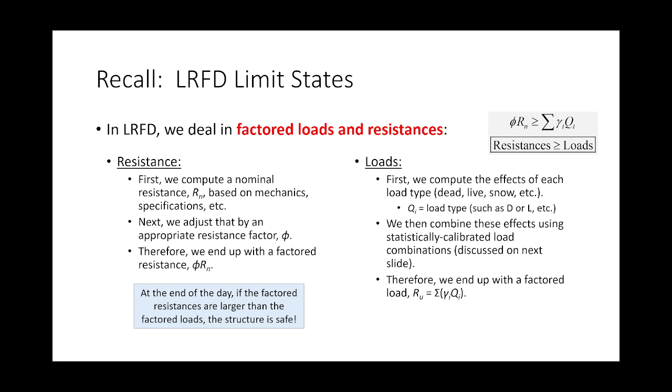So let's recap. Factored loads, factored resistances. We are in LRFD land, so we compare our 1.2 dead and 1.6 live against our factored resistances. Right now, we have two limit states associated with tension members: gross section yielding and net section fracture.

What we're going to do a little bit later, probably Friday of next week, is add one to this: a limit state called block shear. Block shear is essentially, for lack of a better term, a little bit of a weird phenomenon around the connection region, where some of the connection region fails in shear, some of it fails in tension, and you kind of just rip a chunk out of the section of the member. The equation is actually pretty easy, but it's also pretty long. For gross section yielding, it's just these three terms.

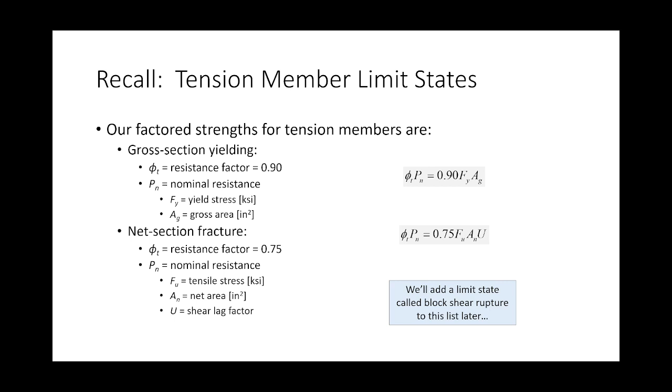And yet if you look at the block shear equation, it's like this big. The first time you see it, you're like, whoa, what's going on here? But it's actually not too bad. It's pretty straightforward, a lot of just gross and net areas. You just got to pay attention. But we'll get to that later.

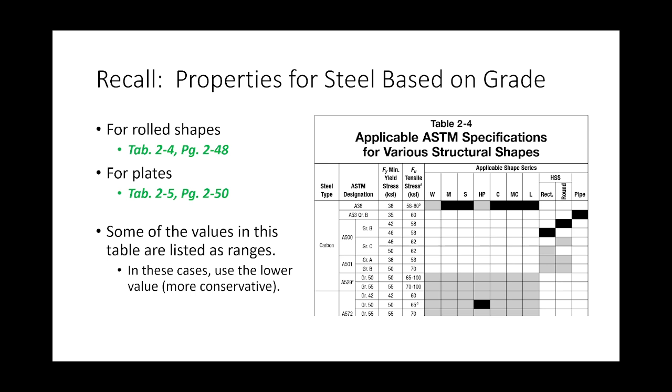Tabs. If you haven't tabbed this, it would be a good one to tab: FY and FU for various ASTM specifications for various steel grades. We've got our complete expression for AN now.

So we know that the net area equals the gross area minus the area lost due to the presence of bolt holes, plus any necessary stagger factors. We add the stagger factors because the whole point of creating a staggered connection is to increase the net area.

That stagger factor is an empirical term intended to account for the benefit we get from a staggered bolt arrangement. Remember the effective hole diameter: we take the bolt diameter and add 1/8 of an inch. You all won't like me when we get to bolted connection land, because when we look at bolt bearing capacity of the members, we're not going to add 1/8 of an inch, we're going to add 1/16 of an inch, since we're actually looking at the physical dimensions of the hole. That's post-exam 1, so you don't need to worry about it now, but just know it's coming.

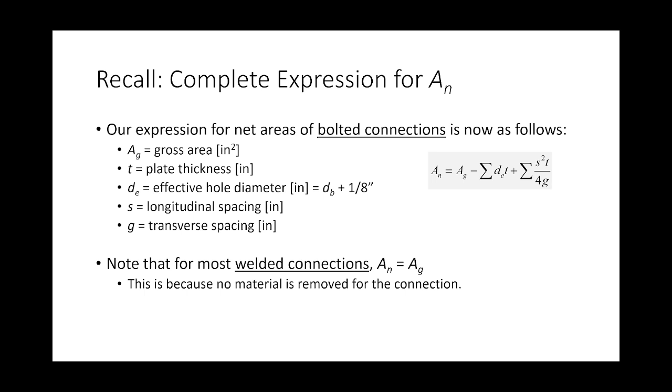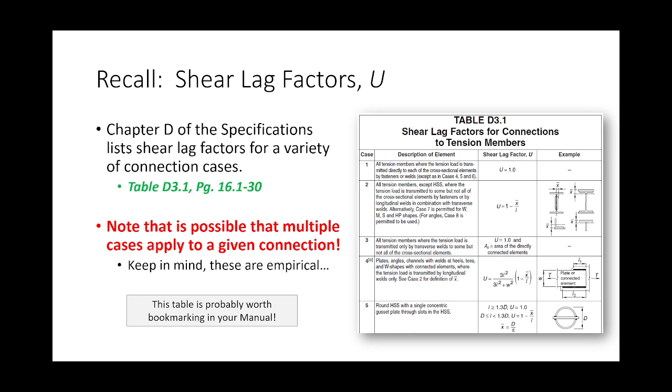That's for bolted connections. For welded connections, net area equals gross area. Shear lag factors are going to be in this table in the spec, table D3.1. If you haven't tabbed this, I would—probably between what I've already told you to tab and the shapes. This is probably all you need for the first exam.

This is the example we are going to do today. We're not going to look at a factored load, we're just going to compute the capacity. But I want to talk a little bit about this problem because it's kind of weird.

We have this bolt arrangement here. This is the cross-sectional view. And then I'm showing you this, and you're like, what the heck's going on here? So let me explain.

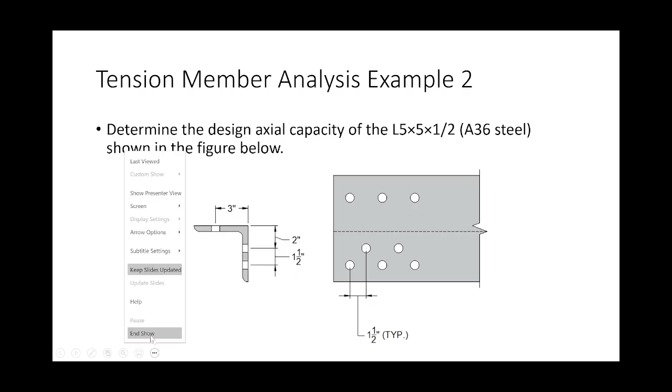I decided to break out some Inventor. Have you ever used Inventor? Okay, so I drew this member out in Inventor so that we could all kind of see it in 3D. So what we've got here is an angle.

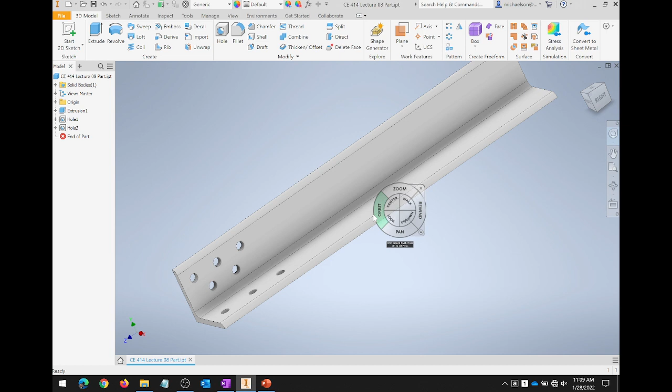What I want to illustrate is that we've got basically a staggered bolt arrangement. One leg of the angle has 2 lines of bolts in it, the other has 1. But the most important thing to pay attention to is that the stagger actually crosses the angle legs. So we have one staggered path that goes like this, and another staggered path that goes like this. The stagger on this second path actually crosses from one leg of the angle to the other.

So there are two points to recognize. Number one, we are going to have different stagger factors for this diagonal path than for this one, because the dimensions are different. So instead of it being the gross area minus 3 bolt holes plus 2 stagger factors, it's going to be the gross area minus 3 bolt holes plus 2 separate, different stagger factors—stagger factor 1 and stagger factor 2.

The other thing I want you to pay attention to is: how are we going to determine what this distance is? And the way we're going to do that is with this image right here.

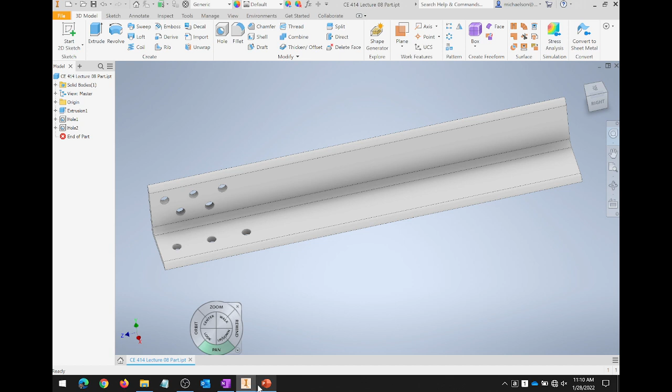In this image I'm breaking out the samurai sword, or the lightsaber if you're a sci-fi fan, making a little cut right here, and taking this angle and sticking it on top. So I'm actually turning the angle conceptually into an equivalent plate, so that I can determine this distance and that distance, which is the one I'm most interested in. Does that make sense?

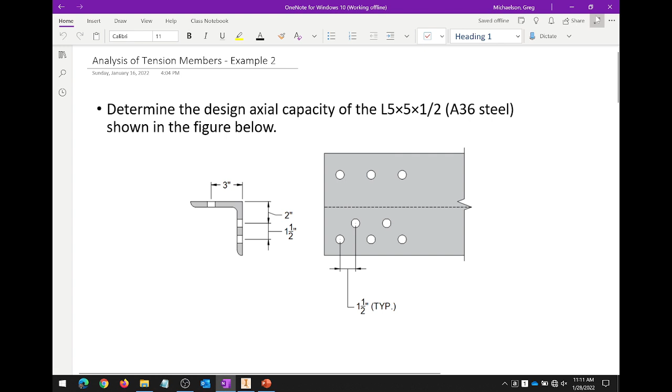I think what's most important is to just get the dimensions figured out across the board. Once you get the dimensions figured out, the rest is pretty straightforward. So let's blow this up a little bit, and make sure we're all clear on the dimensions.

Okay, so this angle is L5 by 5 by 1/2, so it's 1/2 inch thick. What that means is, when I say 5 inches, that 5 inches goes from the back of the angle to the tip. So let's make sure we're paying attention.

What is that dimension right there? Say it again—2 inches. What is this dimension right here? 2.5 inches? 1.5. Okay, so let's write it like this: let's do 1.5 inches.

With me so far? Now what we're going to do is indicate these dimensions over here. So would you agree with me that this dimension is the 1.5 inches—like this dimension here and this dimension here are the same thing? What's this dimension?

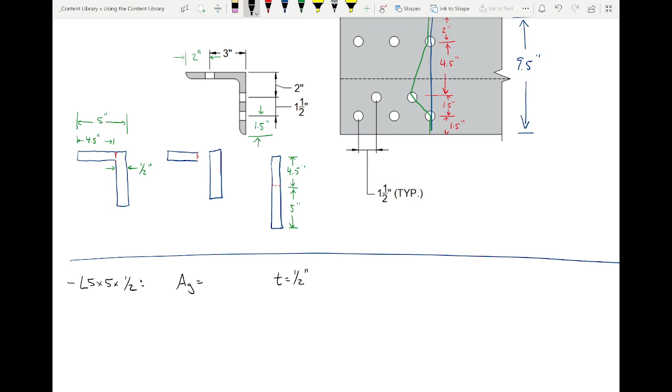And we got that from table 1-7. Is everybody else able to find that? Okay, so we're going to need that. We are also going to need the material properties.

Now for this problem, we are dealing with A36 steel. So we're going to need Fy, Fu. I believe you've already had a homework problem where you had Fy and Fu. So Fy for A36 steel is what? And for Fu, what is it? 58. There's a range, use the minimum. So this is 36 KSI, and this is 58 KSI.

All right, and this is from table 2-4. Hold on. So I am trying to ensure that I'm writing references so that you're not going, where the heck is he coming up with these values? So, okay, I'm going to do all my limit state calculations in the end.

I could go ahead and do gross section yielding, but I'll just wait. We'll do that later. Let's do the net area.

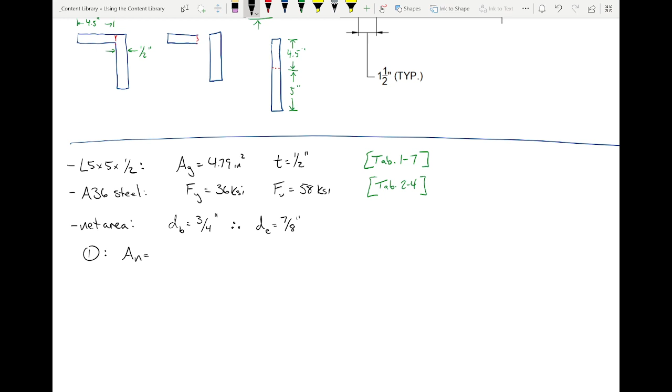Let's do failure path 1. So as we said, the net area is the gross area minus, and how many bolt holes are we going to subtract for net or path 1? 2. So 2.

d_e t, which is, here, let me move this down a little bit so it doesn't crowd it so much. Or 4.79. So what is that? Do I have a second on that?

Okay, now let's do path 2. So path 2, we're going to do the gross area minus 3 bolt holes plus the stagger factors. Now let's talk about those stagger factors.

What is the formula for a stagger factor? Let's put that up here. That's the formula for a stagger factor, right? S squared T over 4G.

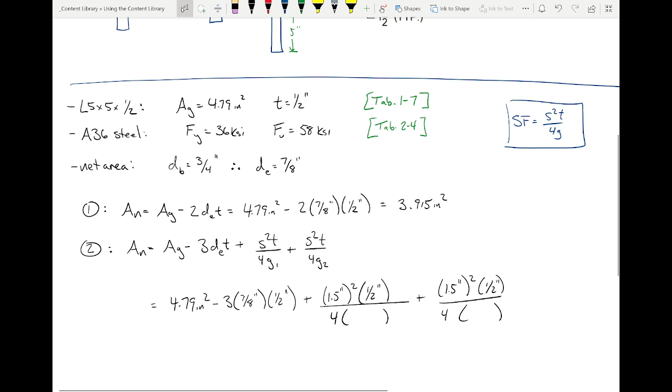So we need the two G distances. It doesn't matter what order we put them in. What are they? 4.5 and 1.5. And so what does this come out to be?

3.73 square inches. Do I have a second on that? What? I've done something wrong. Take your time. Yeah, 3. Check your exponents and check to make sure you got a 4 on the bottom of your fractions.

All right, so we've got two values here. Remind me, which one do we use? The smallest. Yes, sir. Can you scroll up to the picture a little bit? Yeah, hold on, let me write this down so I don't forget.

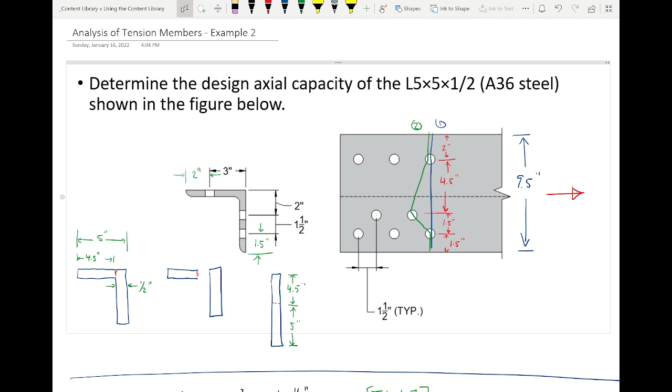So I'm proposing that if we were to just treat the angle as a plate, the gross area is 4.75. But what is the gross area? What are we using? We're using 4.79, so we're accounting for that little bit of additional area. It's not that much, just a little bit. It's from the way angles are formed, there's a little fillet there. So we don't really worry about it from a stagger factor perspective, but we do account for it.

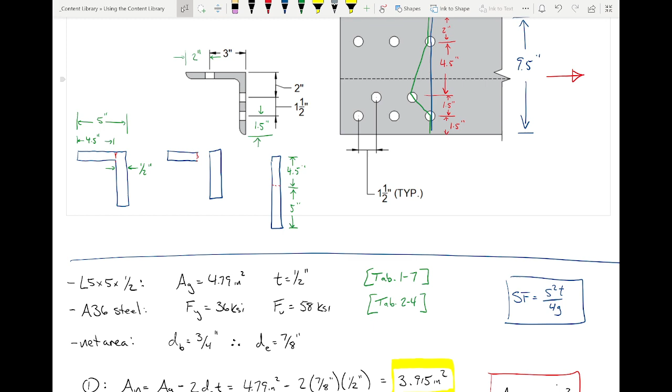This is great stuff, that's a great question. Any other questions? This is good stuff. Okay, so there's the net area.

Now, shear lag factors. This is table D3.1. Now we're going to have a discussion on this one. So I want everybody to turn to table D3.1. I want to look at this for a second. I'm going to ask a simple question: what's the shear lag factor for this problem?

1. Why? Because both of the sides have holes, so it falls under case 1. That's exactly right. Whenever you look at the shear lag factors, what you're looking at initially is case 1 versus case 2. Case 1 says all of the cross-sectional components are connected by fasteners or welds. Case 2 says some of them. It's never none of them, because it's got to be connected to something. So it's either all or some. But in this case, all of the cross-sectional components are connected by fasteners or welds, so U is U1, or 1.0.

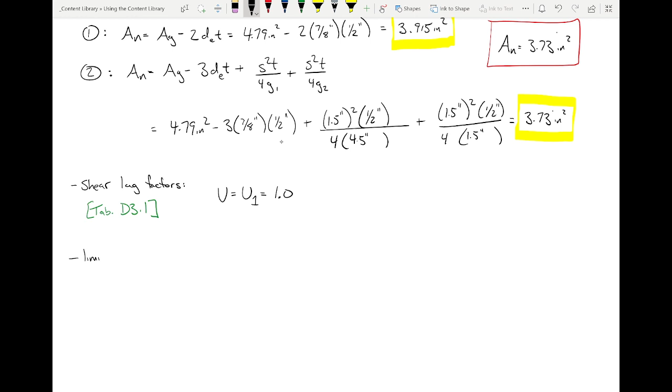So gross section yielding, that's 0.9 FY AG. FY is 36 KSI, this is 4.79. So when I chug this out, what do I get? We'll say to one decimal place, because when you're looking at capacities in terms of kips, one decimal place is enough. 155.2. Well, do I have a second on that? Okay, kips.

All right, now how about net section fracture? So 0.75 FU ANU. What's that? 162.3 kips. Do I have a second on that?

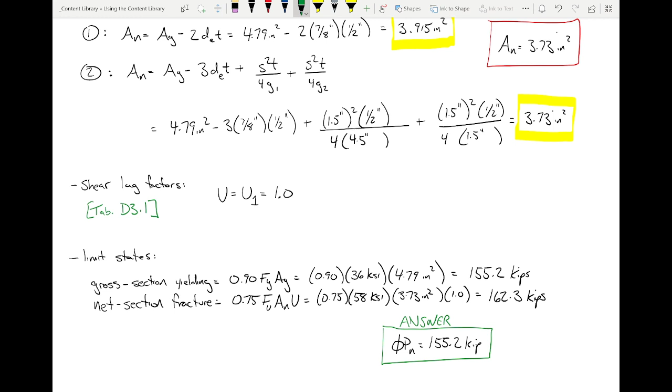Anybody have any questions? All right, I want to talk a little bit about design before we call it for today, because we've got a little bit of time, so I'm actually going to skip ahead a little bit to the next lecture, because I think this is important. So I don't have this posted yet, so don't—this is my lecture from last year, so the slides are old and whatnot.

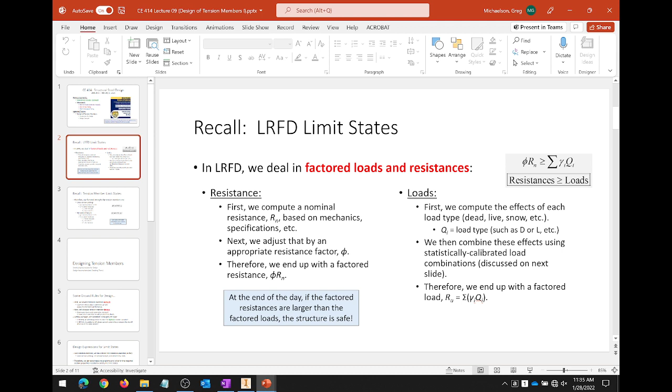No, it's just the date's off.

I want to talk a little bit about design because I want to illustrate this concept to you. What I'm going to put on that pre-recorded video is just the plug and chug component of it. What I want to talk about today is the concept.

So first off, let's take a step back. Today and in the previous lecture, we did tension member analysis, or tension member assessment, whatever you want to call it. What that means is we've been given a tension member and we're saying, okay, here's the tension member, how much can it hold up?

Basically, we are assessing a tension member that has been given to us. But that is not design. Design is: I know I have a structure that's going to need a tension member right here, which tension member do I select to safely resist that load? That's design. Design is selecting the components and the assemblages of a given system. That's what design is. So we need to talk about that for a little bit.

I want to explain how we do it. So we covered tension member analysis. Given details about a member, we can assess the member's performance. Now we're going to talk about design. What design means is that given some loads, given some constraints, we will select that element.

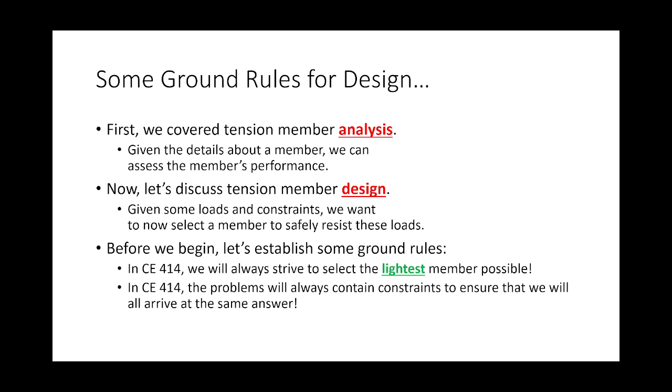So we're in design mode. What that means is we've got a member we're going to design or select to resist some given loads. So I know the loads, I've got the 1.2 dead and 1.6 live. So what's the resistance? Well, it's 0.9 Fy Ag if we're just looking at this limit state. So 0.9, I know that.

Fy - now let's say I didn't tell you what the yield stress is. Well, you could easily figure that out if you say, I'm going to use a W section, I can use Fy as 50 KSI because that's the preferred material specification. If it's an angle, we'll use grade 36.

So if I look at that equation, what's the unknown? The unknown is the gross area, right? So I can divide both sides by 0.9 Fy, and I can say that my gross area has to be greater than or equal to Pu over 0.9 Fy. So given a factored load, I can take that load, divide it by 0.9 Fy, and that gives me a gross area. And I know that if I pick a member that has a gross area of at least that, then I'm good. Boom, there's a design expression.

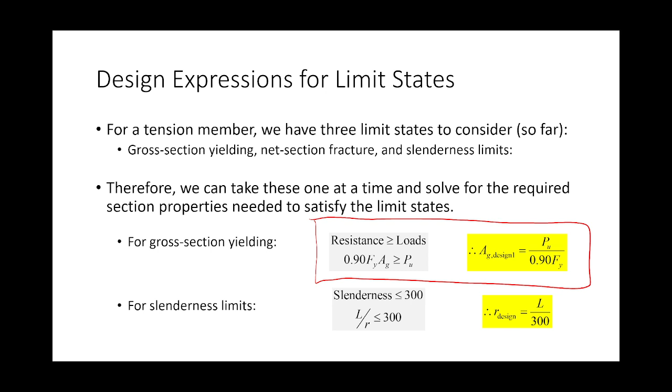What else do you need for net section fracture? You need a shear lag factor. How do you determine a shear lag factor if you don't have the connection geometry? You don't know what the member looks like. How do you determine 1 minus x-bar over L or any of that stuff? You have no idea. See, the problem is there is no closed form equation that we can come up with.

We can't solve for a required gross area for this because there's too many unknowns. The net area is a function of the thickness, but we don't know the thickness before the member is selected. The shear lag factor is a function of the member geometry, but we don't know that in the beginning. So what I like to do is make a guess.

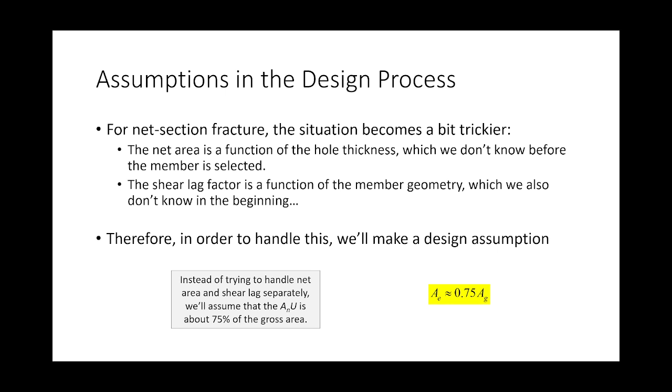A good common guess is that the effective net area, the net area times U, is about 75% of the gross area. That is a complete guess. It is an assumption, it is not always the case. Test the problem we just did - take the An times U and divide it by the gross area and see if it was 75%. It probably wasn't, it might have been pretty close, but by and large, for every tension member you could ever conceivably do, if you were to plot all that, that's about what it would be - about 75%.

So I propose that we can come up with a second formula for the gross area design, and instead of saying Pu over 0.9 Fy, we'll say Pu over 0.75 squared Fu. Now why is it 0.75 squared? Well, it's 0.75 squared because one of the 0.75s comes from the resistance factor, and the other 0.75 comes from this being 75% of the gross area.

For simplicity, what I like to do is combine both of these into just a single expression. In other words, I'm going to calculate this, and take the bigger of these two. But the bigger of these two is basically whichever one has the smaller denominator. All right, does that make sense?

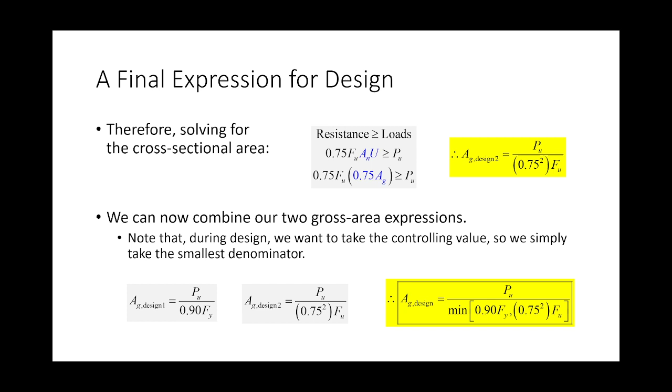Let me show you a step-by-step process and then make a couple comments and we're going to call it. So for design, we're going to determine our factored load, compute our gross area for design and our radius of gyration for design. Then we're going to pick the lightest shape that we can find that has a gross area bigger than this and a radius of gyration bigger than this. Then what we are going to do is analyze that member, just like we did in the last homework and in this homework. We have to analyze it because in order to use this equation, we are making some assumptions, and we must analyze it to verify those assumptions.

Look at the member at the end of the day. If it's strong enough, great. If not, pick another member and try again. We'll go through some examples on this here in a bit. But before I call it, let me give you my final little rule of thumb.

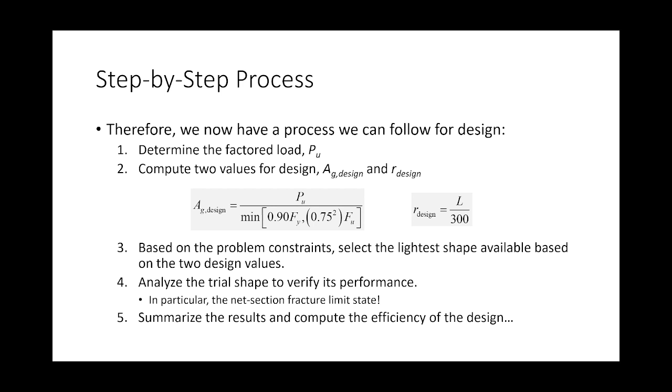Okay, so step four is a very, very critical part in the process. What you're going to do is you have a trial shape, and you are going to analyze it to verify its capacity. But if you get a member that's good, the question is: is it too good? For example, if you pick a member for a 200 kip load and its capacity is like 700 kips, it's probably way over designed. You can probably back it down a little bit. So how do you know whether or not your member is efficient or not?

So what we do is we compute an efficiency. We take the final load over the final resistance, so it's like a percentage, right? In bridges, we call that a performance ratio. Here, we're calling it an efficiency. It's kind of the same thing. The idea is that if that number is 90% or greater, you're good, okay?

So what I'm getting at is if you have a really, really low efficiency, I would check the next lightest member. But if it's like 90% or greater, it is very possible that the next member is good, but I'm not going to make you check it. Does that make sense? Because here's the thing: it is very rare to get a design with 100% efficiency, just because of the messiness of the numbers. It's not going to be perfect. So as long as your design is good enough...

If you have a member that has 99% efficiency and you're like, oh, I can do better, so I'll select the next lightest one - the next lightest one will probably fail. So there's no point in doing all the math, is what I'm saying. So if you get close, if you get to 90%, you're good. Most of the problems, at least on an exam I formulated, I'm not trying to make this part confusing.